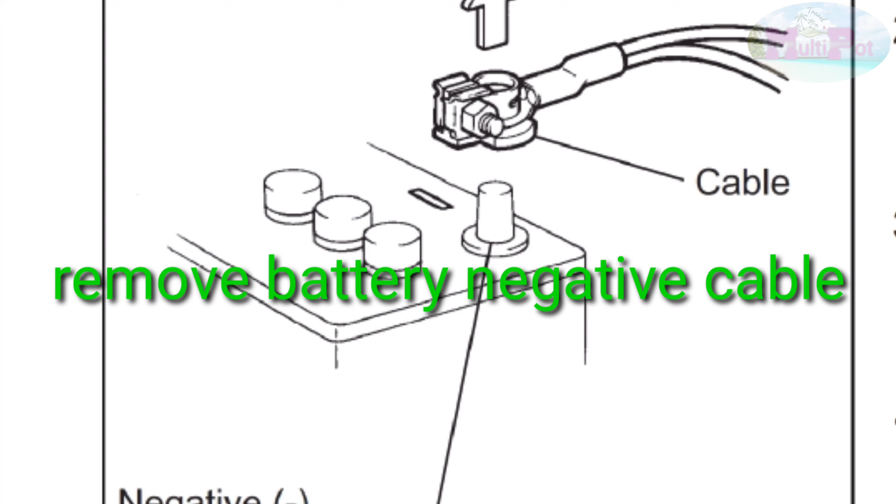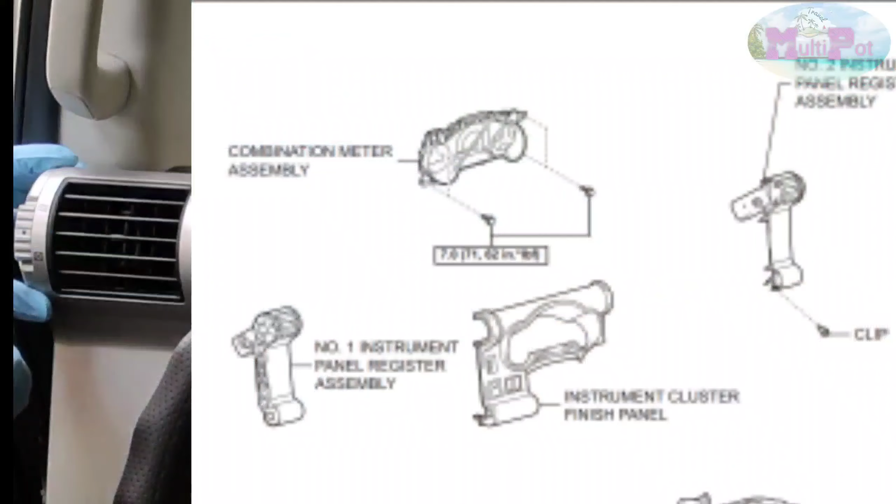Today let's see how we can do the evaporator replacement of FJ Cruiser. It's a 2010 model car. So let's start by removing our dashboard in the beginning. So on the whole, first you need to remove this panel. It's just nut fit and it has 4 clips here and here. Just pull it. All you need to be careful about is just keep the register in the center.

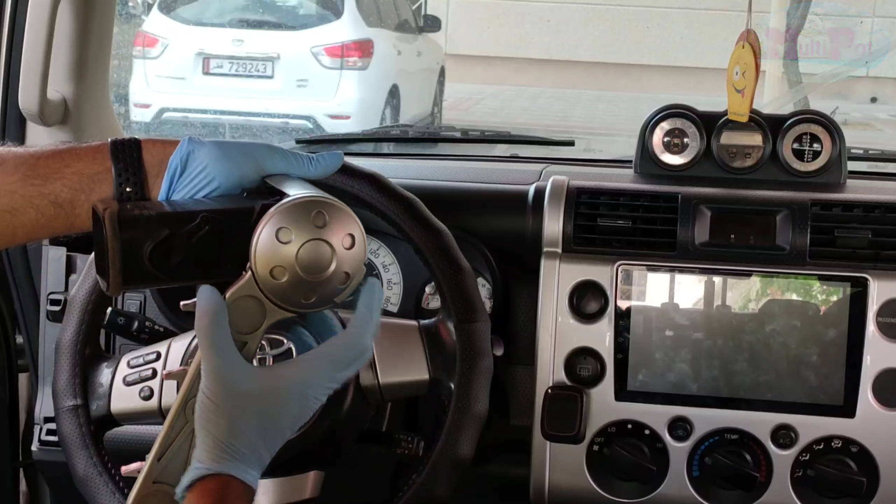Just pull it. When you pull, just try to pull the downside first, and once it starts moving, just pry on the upper side. That's all. You just get it into your hand. See, these are the 4 clips, 1 2 3 4, and all you need to be careful about is this one, just keep it in the center. If it's on one side, see, it may touch there when it's pulled, so mind that.

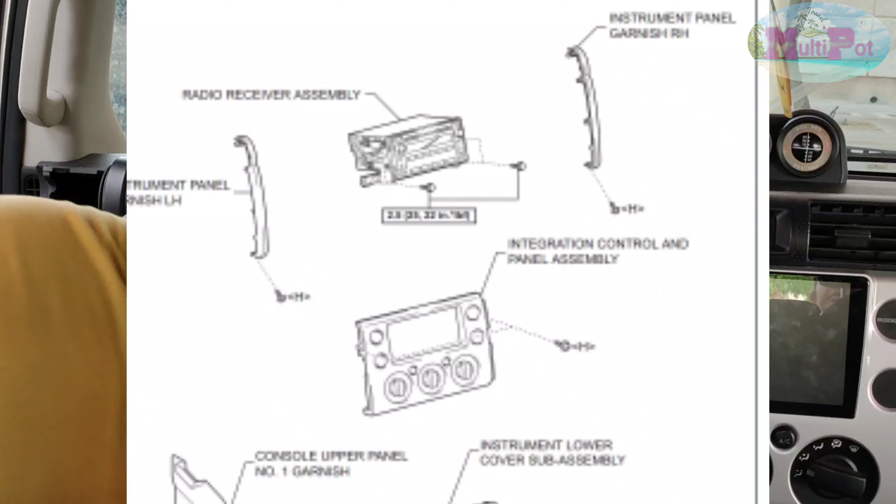That's all. And second, we need to remove this panel. For that panel, all you need is a 10 millimeter bolt down. You need to remove that. No, it's not a 10 millimeter. So on both sides of the panels, these are the trim panels. You find these plus screws. Just remove the screws.

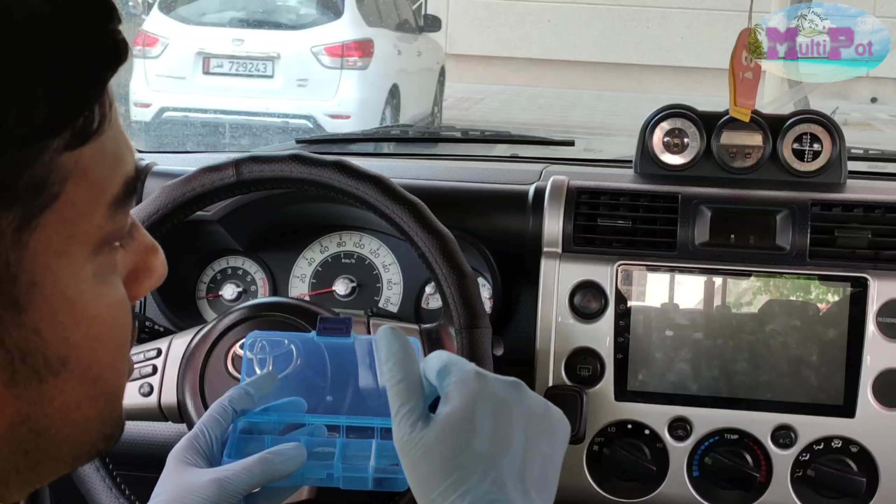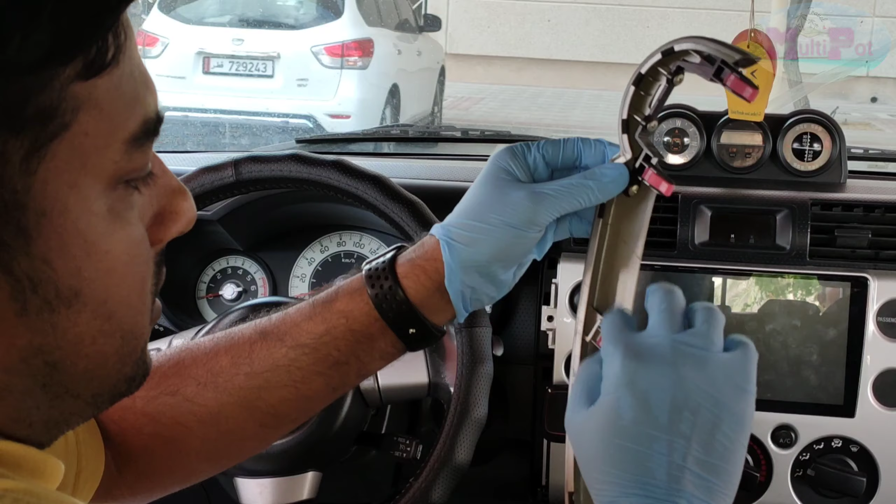And I don't want to miss any of the things, so I just keep the things where I removed them in here. And usually if I could not finish the work in a single day, I write where I removed the screws from and how it was if I find something special, because it's not our daily work, so it's better to have a note on it, so you will not have any difficulty when you are fixing it back. It has 3 pins to remove, and this is fine, it's done.

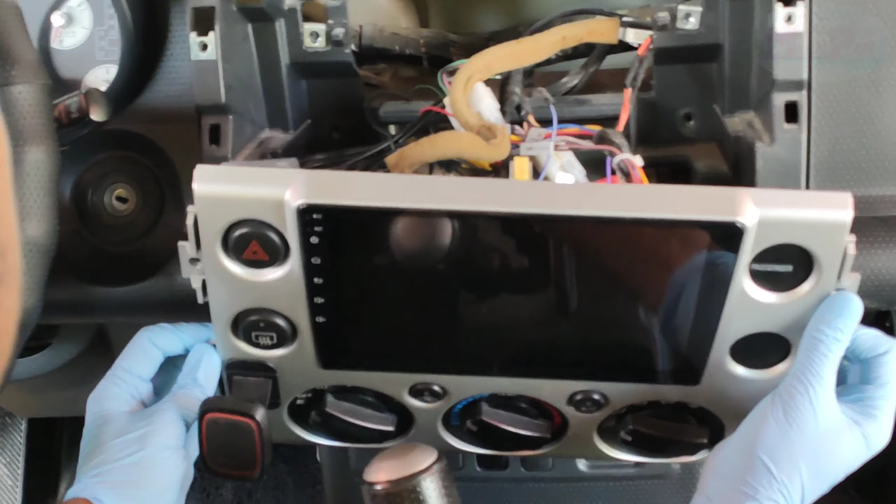2 pieces. Next you may need to remove this panel. It has the connections for the whole unit. Just be careful about it and pull it. Take your time when you are removing all the harnesses, and if you have any plastic tool you can just use it, and you don't need to worry about any harnesses.

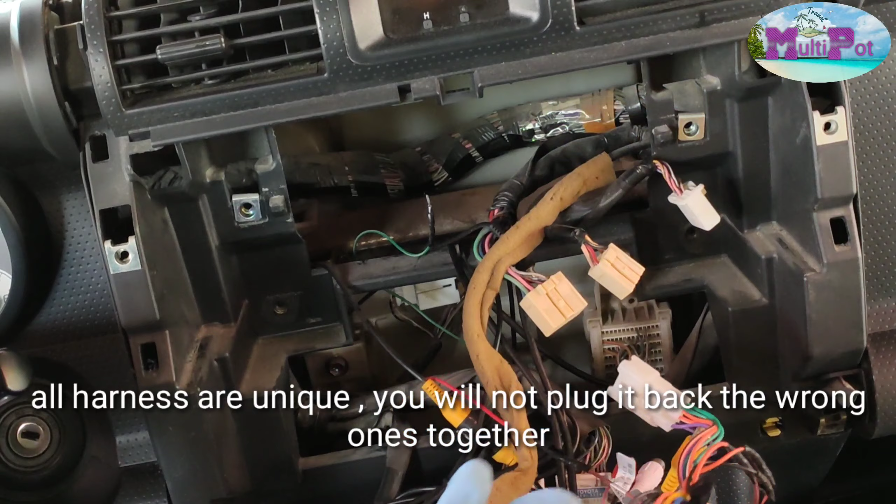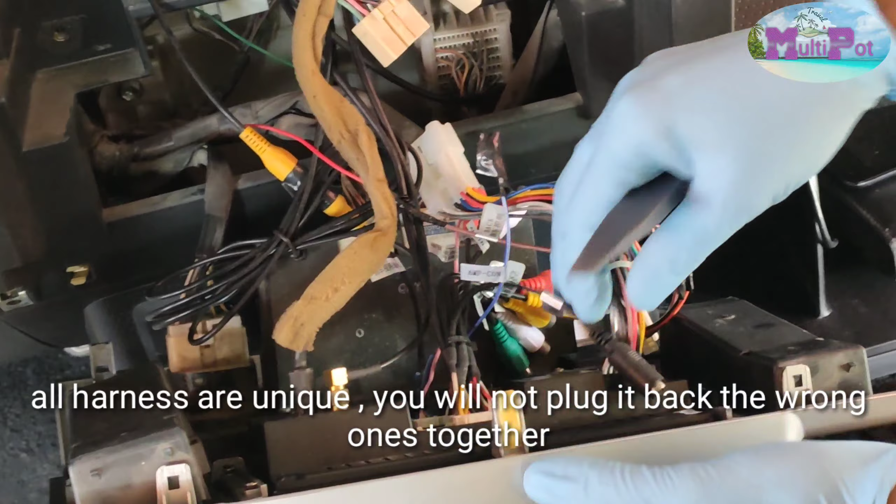You won't mismatch them when you are fixing it back, because all of them are unique, and mine is not a stock system, so there are different connections than a normal stock system in your car. It's a new LED system, and that's all about removing your music system. And just have a look at where you removed the things, and if you take a video when you are removing, it's far better. You will get a better idea, and you can have a reference when you are fixing it back.

You may wonder how I found the evaporator is leaking. In this car there is no way to visibly see it, but I got the smell of the oil which we usually add along with the refrigerant. The gas doesn't have any smell, but the refrigerant oil has a smell. So I felt the smell when I turned on the AC.

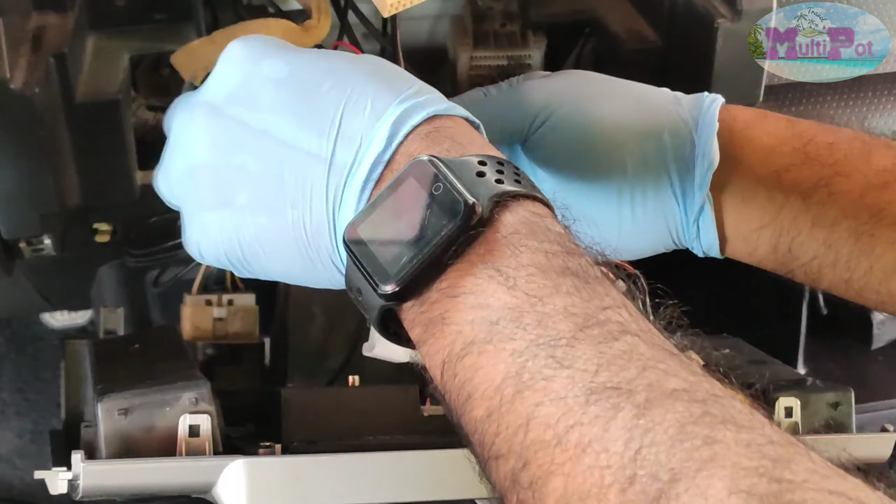Usually in the beginning we get the smell, so I thought to remove that. Usually the smell comes when the evaporator is leaking. If I keep running with the same evaporator, eventually it will lose all the oil and end up ruining my compressor as well, so I don't want to do that.

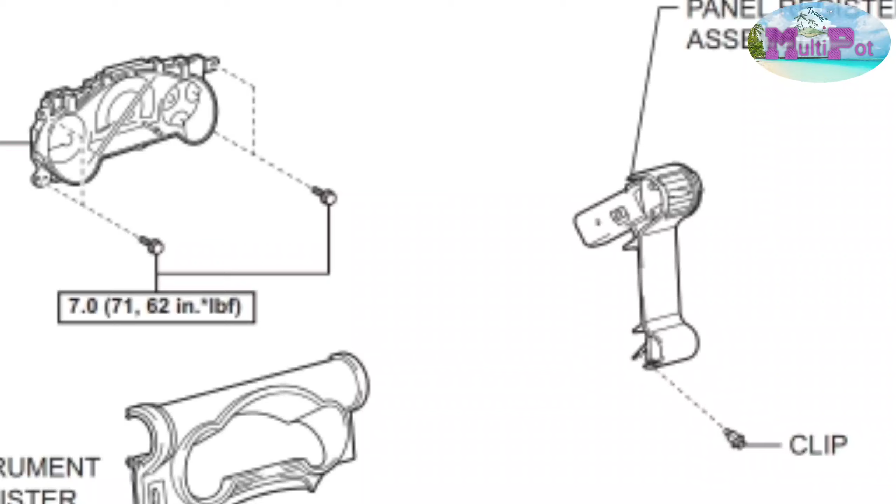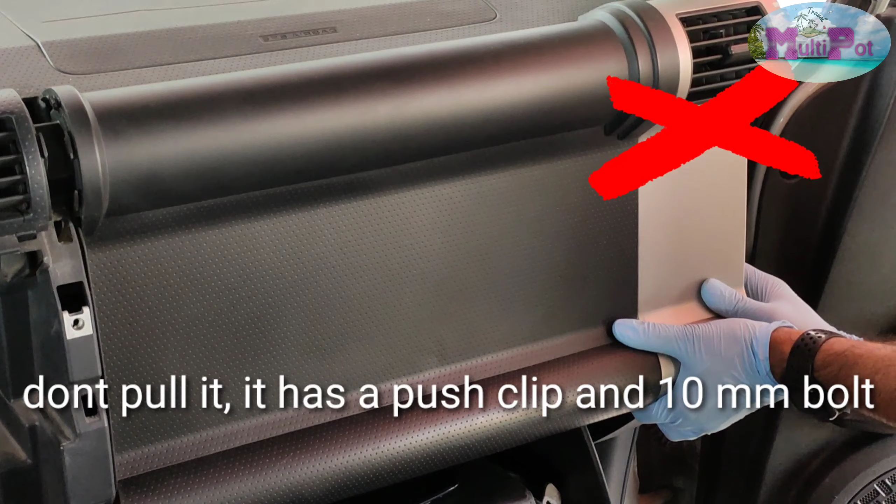When you come to remove the panel assembly on the right hand side, it's a bit different than the one on the left. It has a pin on the downside, and it has a horizontal 10 millimeter bolt which is inside, so don't attempt to pull it. I tried to pull it, but I have the procedure chart with me, so I had a look at that and I came to know that. See, here are the pictures for that. Just have a look at this.

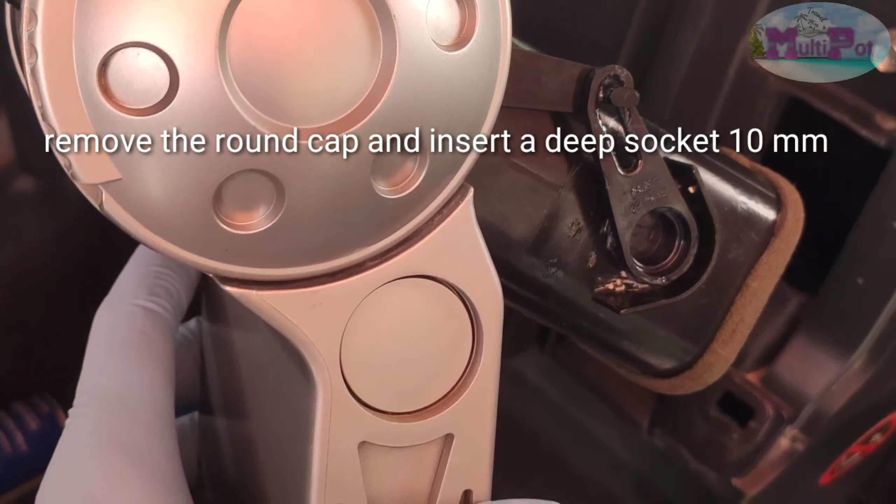You see the round part at the bottom, you just pry it with any pointed thing or your plastic tool. You will find a 10 millimeter bolt inside. Just remove that and pull it like you did on the left hand side. That's all. To access the lower pin, you need to remove the glove box and the panel just behind it. The glove box you can just push on both sides and remove it, and for the panel there is a screw. You just need to remove that and pull it down. That's all.

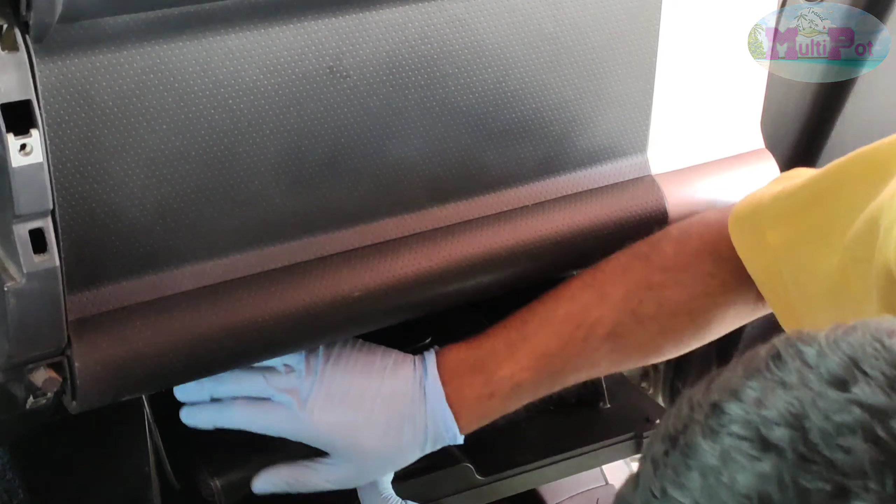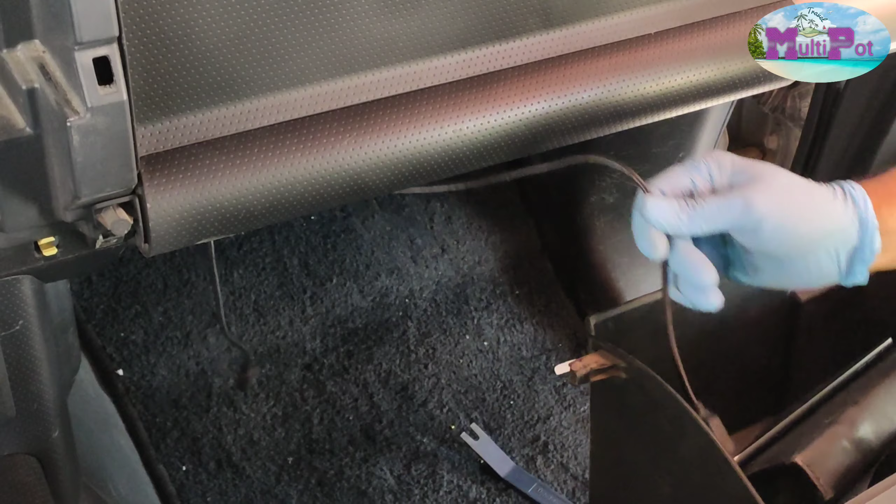Remove it from here. Remove the glove box. On the right hand side of the glove box you will find a movement control. I don't know what the name of the part is exactly. It just controls the movement in a slow paced way. Just remove it. It's just a hooked up thing, the one with the yellow end. Just push it out, then take the glove box out.

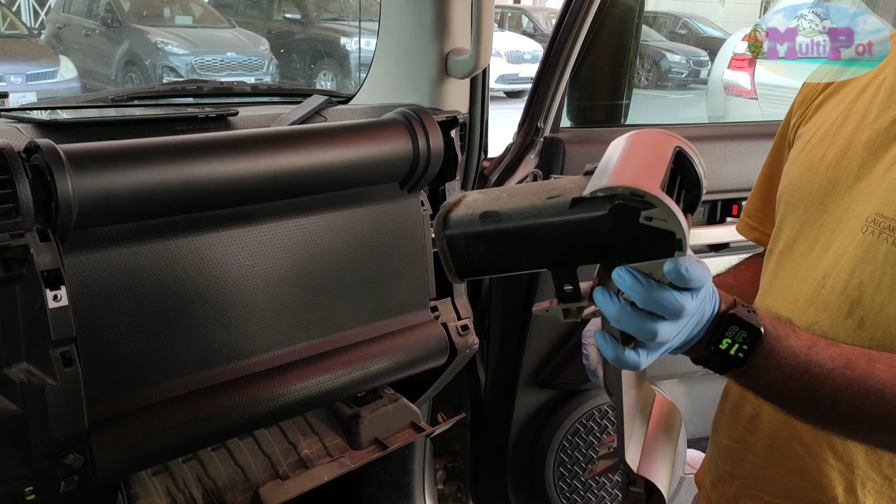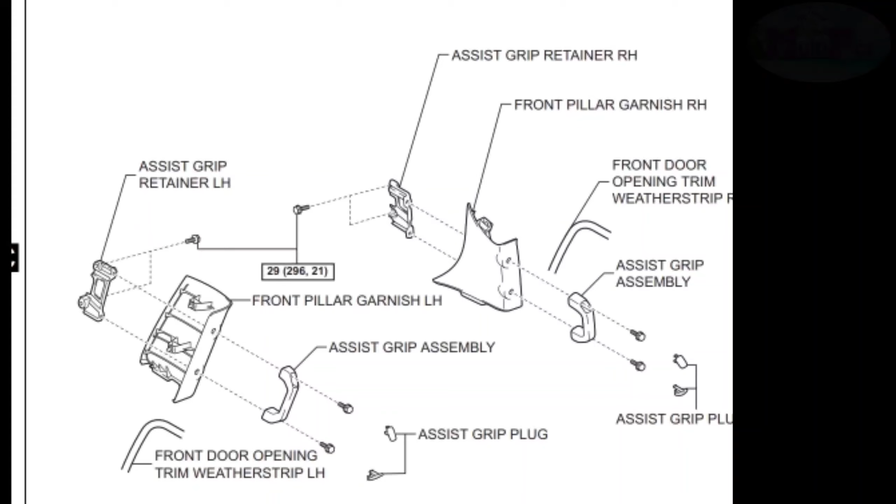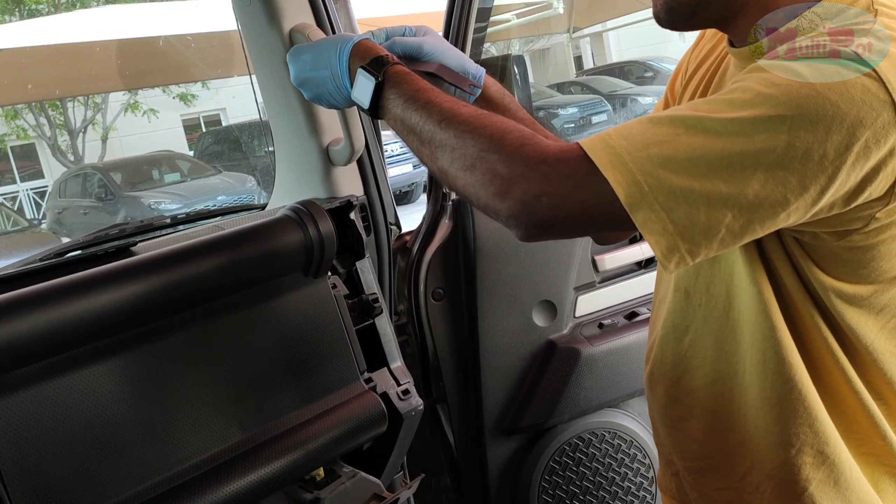Once you remove this panel, you will be able to pick the screw for this. So remove this part as well. So once you're done, next is the A pillar cover. The cover you need to remove, and I just keep it in this. If not, I may miss it.

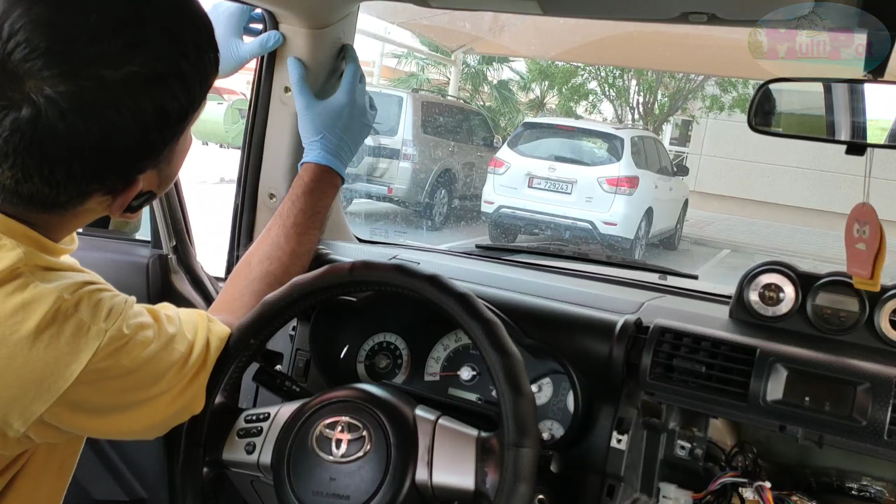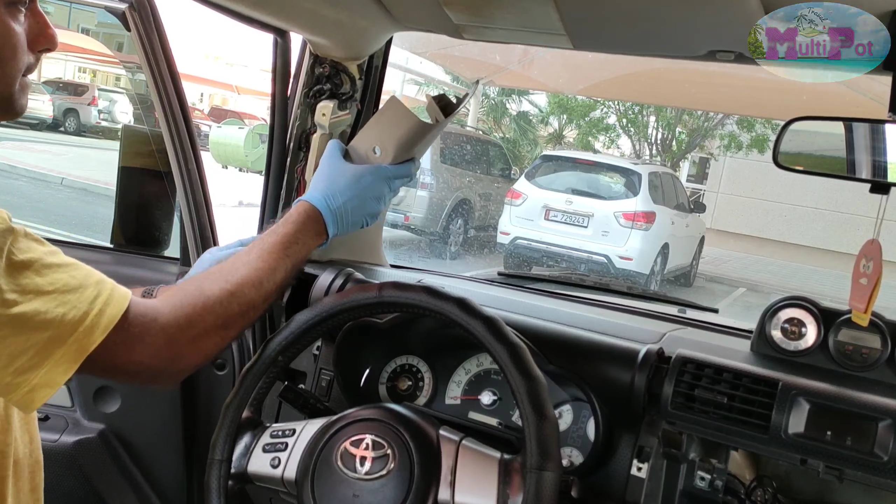This A pillar and its cover, I just kept it there, and just remove the weather stripping. The stripping, you need to be a little careful. It's even the same thing with the weather strip, you need to pull out. And there is a 10 millimeter you need to remove.

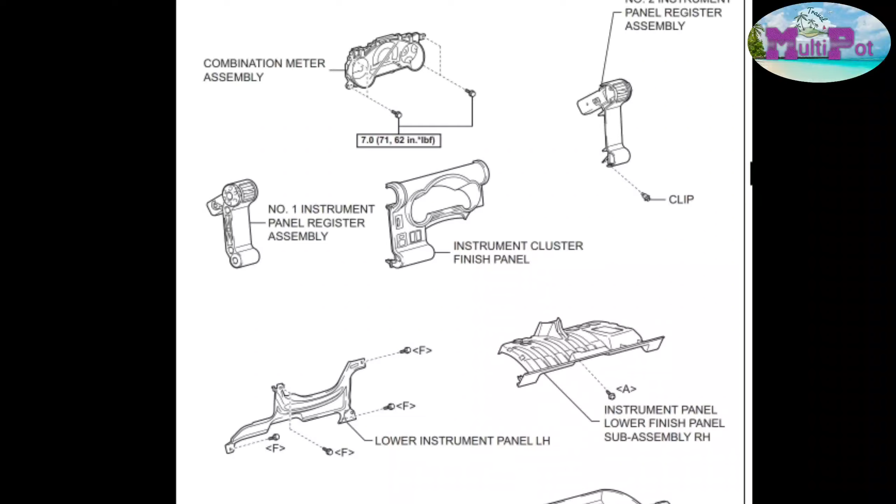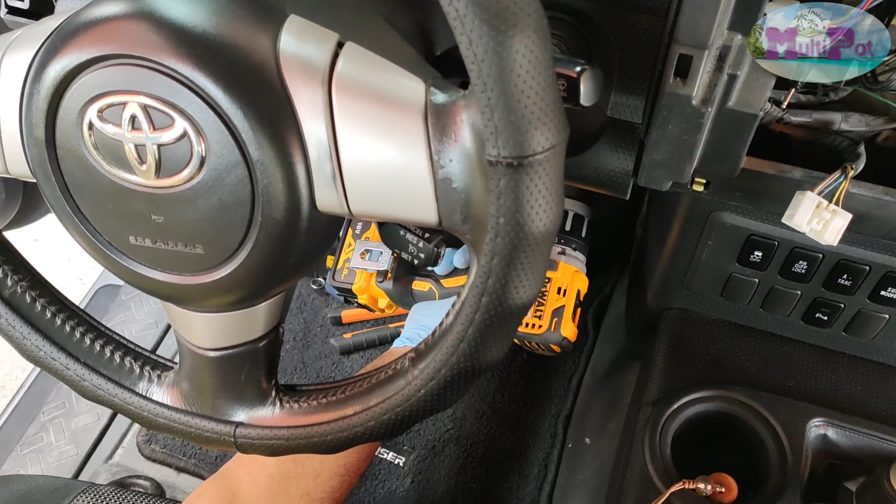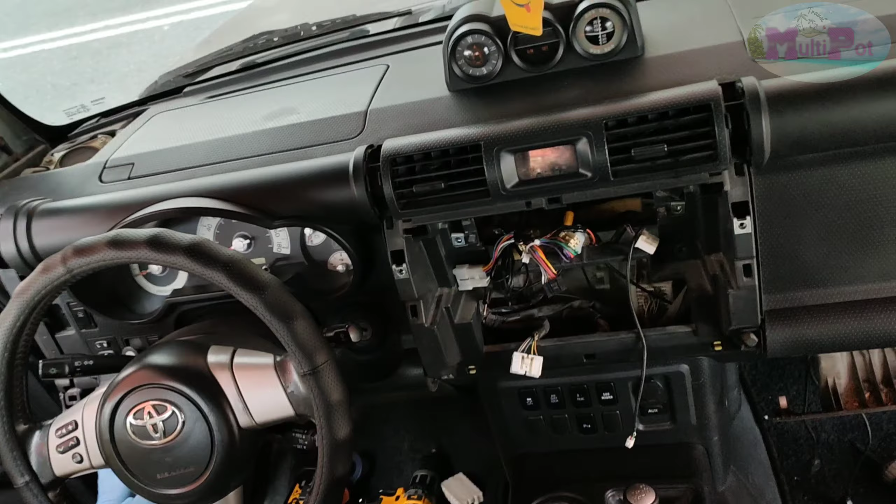Now you need to remove the panel just above the steering and around the cluster. Let's remove that. For that it has two 10 millimeter bolts on both ends. Just remove that and you can just pull it easily. And there is a panel as well for this. Here there is a 10 millimeter.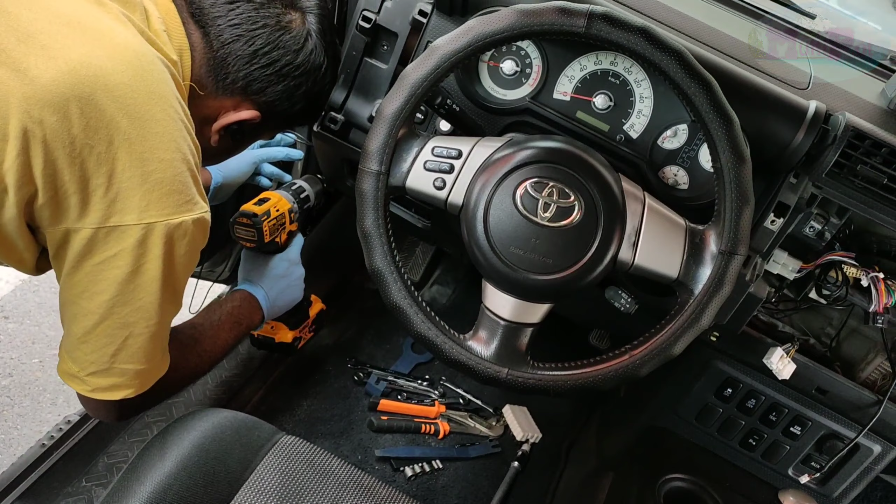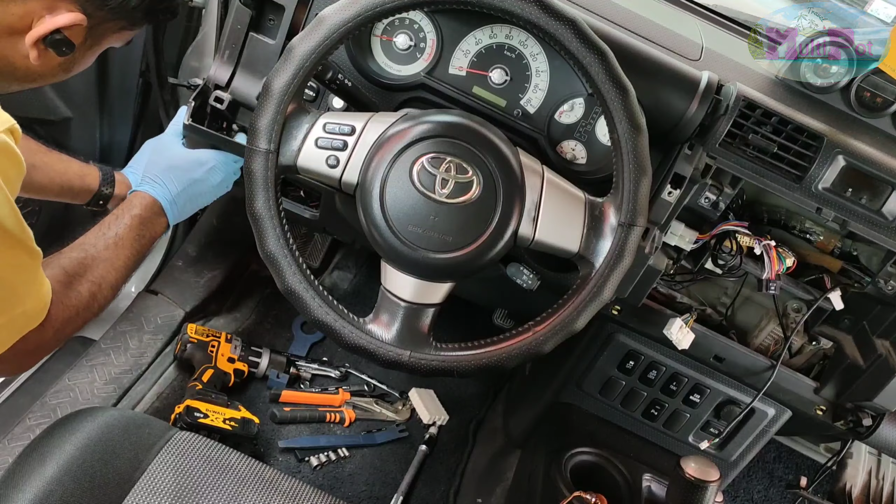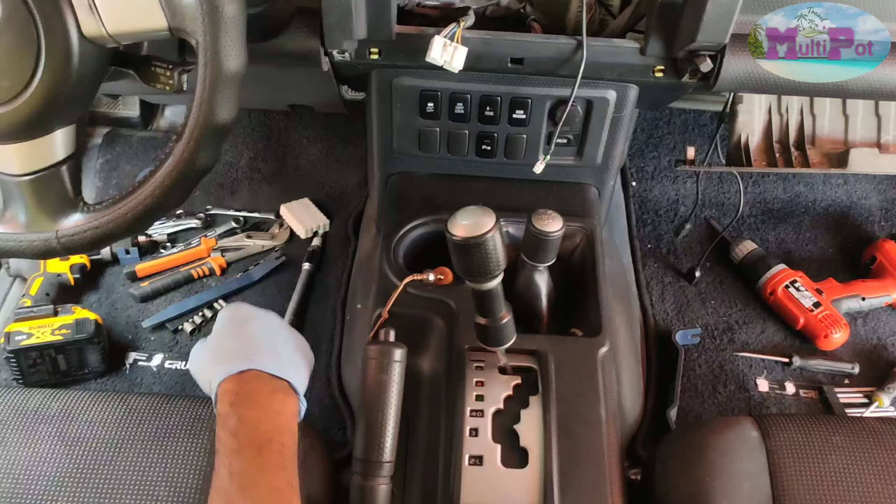Once these two bolts are done, you can just pull this off. But before that, just remove the ring around the key where you insert. Just remove this one, or else it may just break off. It's just a snug fitting thing. Just remove that. And now we can just pull this off.

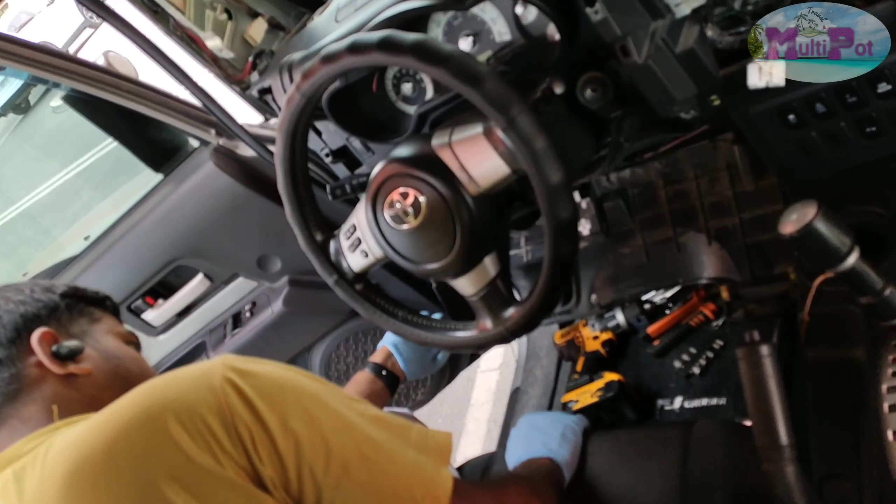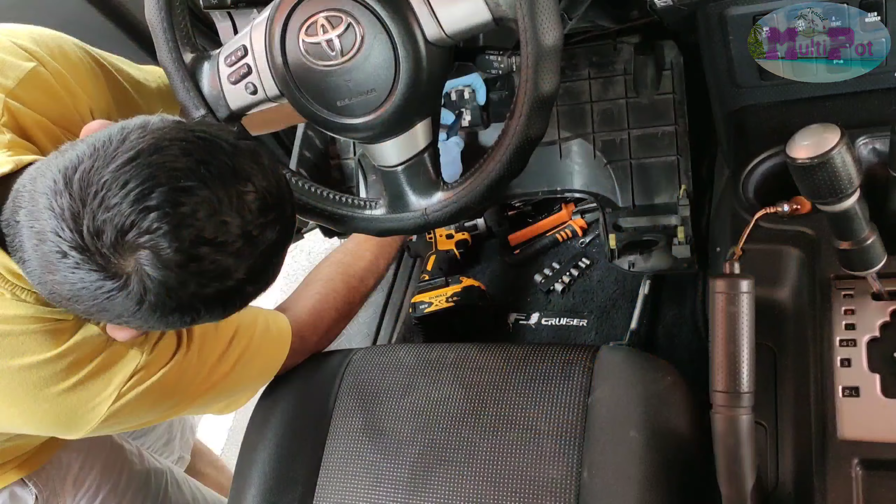It is just connected with the hood opener latch, and if you just remove the plug for the hood opener, you'll be able to remove the panel and keep it away. Just use your plastic tool, just depress one end and push it out. You'll understand that once you see that.

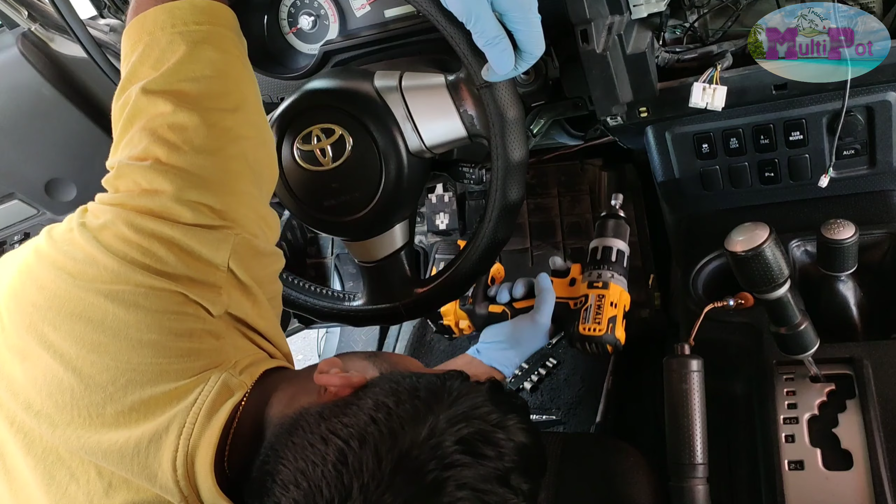Below that panel you will see a metal frame which has 4 bolts. You need to remove that as well. Now you can just see 2 bolts up and 2 on the lower side. You can just remove that as well, and easily you can just pull it out. Here one more. Okay. Once that's done, just pull this out.

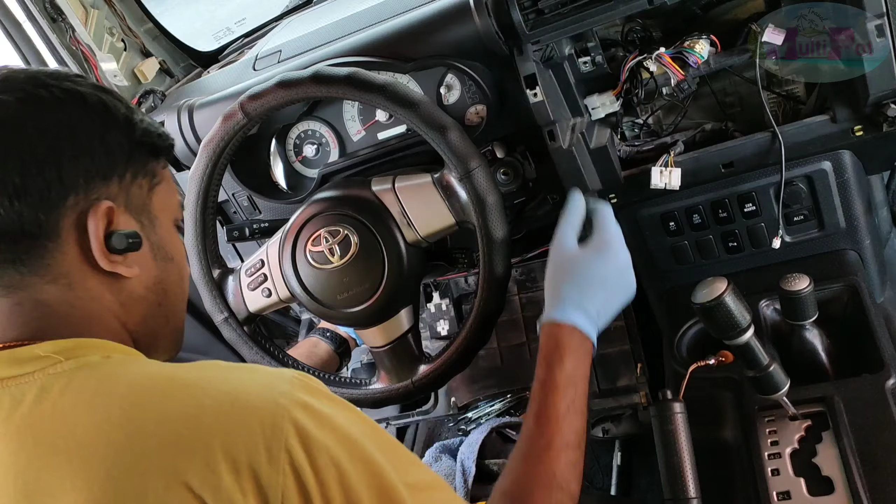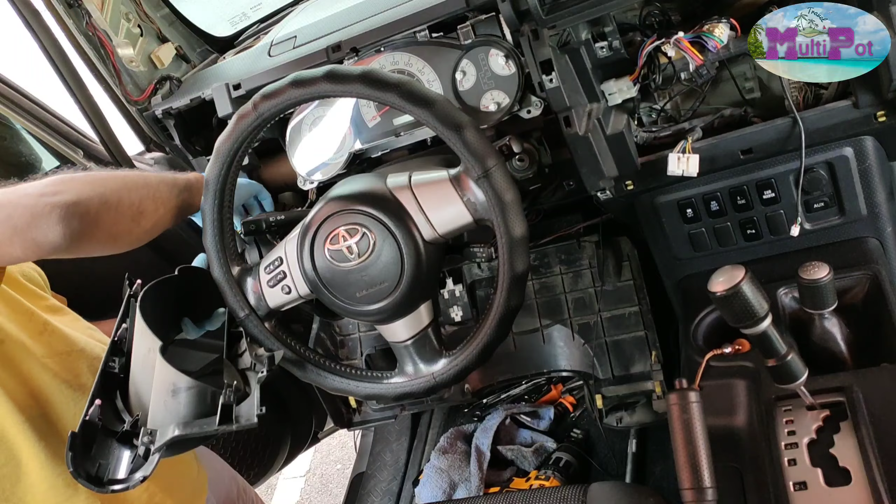When you remove this panel, just try to pull the things on the right hand side and turn the panel on the left, because on the left hand side there are some harnesses which are connected for the switch and mirrors. So just care about that, just turn it that way, and once it's done, just remove the connections from that side. And remove the connections which are connected over there.

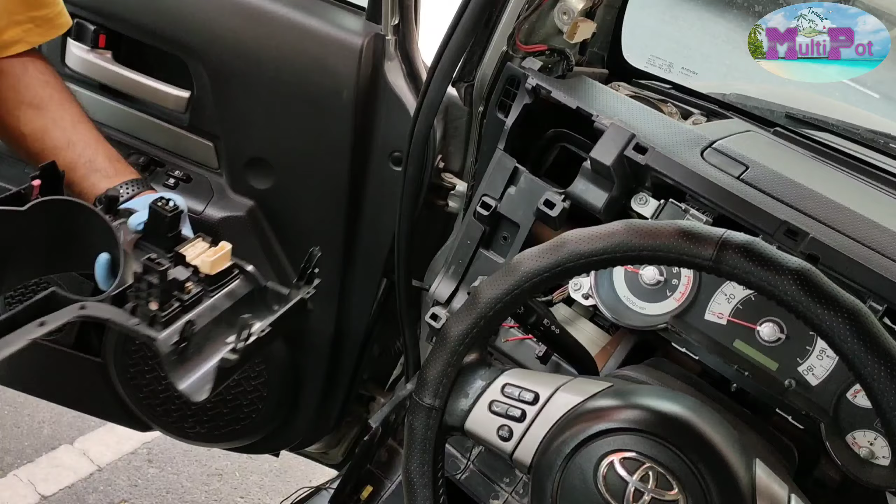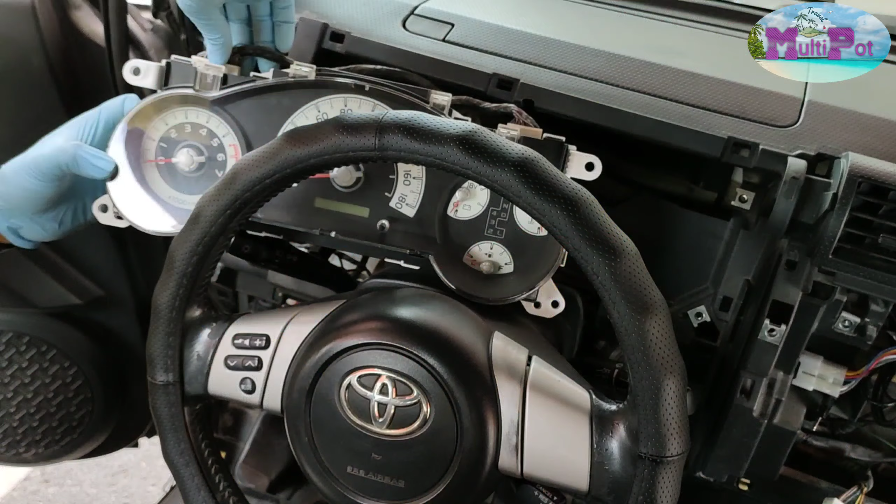Now the instrument cluster, it has 4 10mm bolts. Just remove that, or you can use a Phillips screwdriver to remove that. Remove it manually. And remove the connections of your instrument cluster. It has 1, 2. And remove the plug which stabilizes the wires, and once you remove that, you'll be able to take the instrument cluster out of the place.

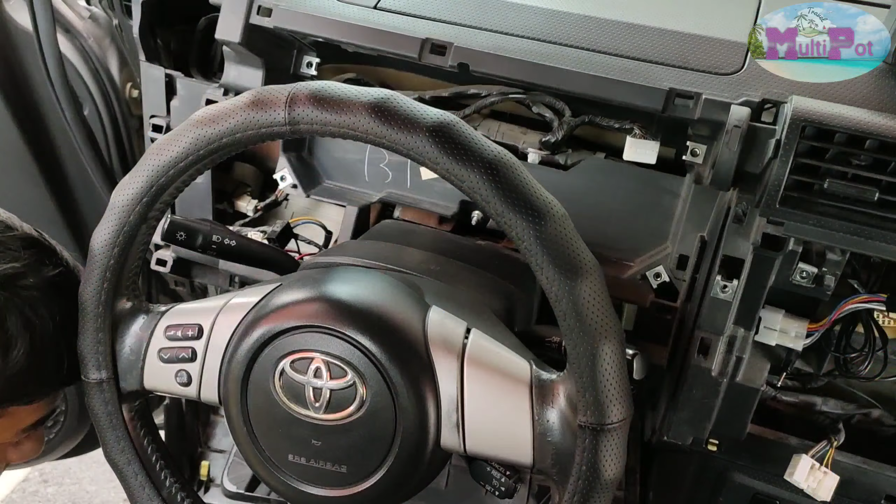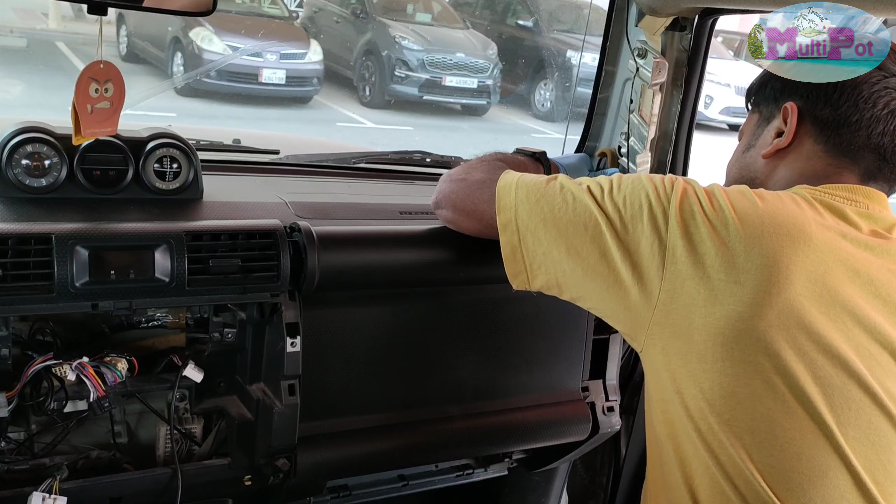There is a 10mm nut which is just behind the steering or the instrument cluster. You need to remove that. You may need to remove the cover of your speaker. There are 4 clips on the 4 corners of that cap. Just insert your plastic tool in it and just pry it out. It will be easy to remove that. And once you remove the cover of the speaker, you'll find a 10mm bolt. Just remove that.

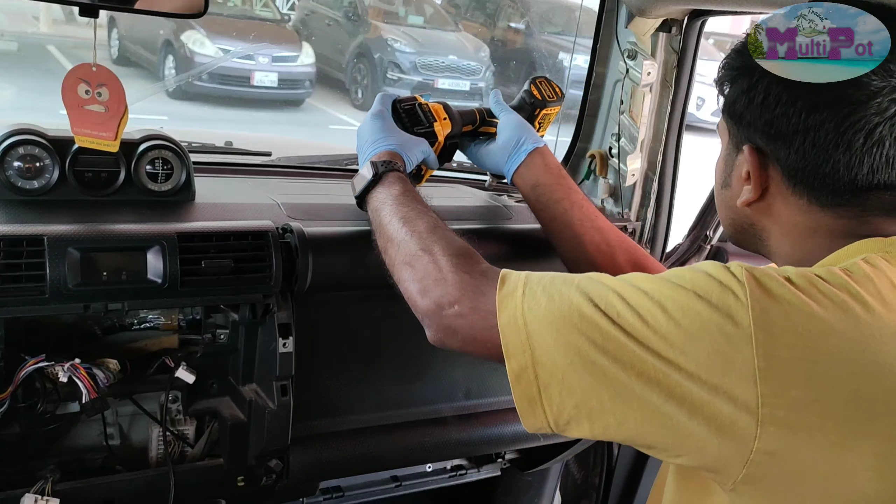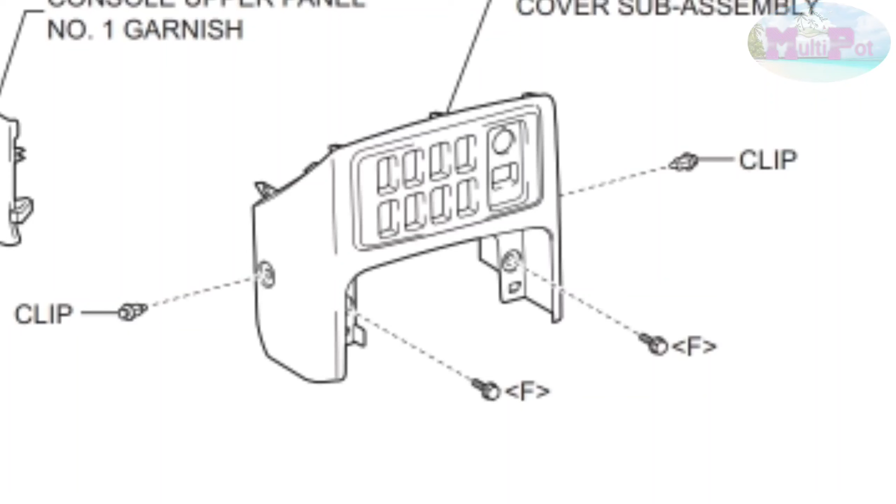Now let's come to the center console. This part we need to remove. Before that, we need to go for the center console, which includes the gear levers and the handbrake lever. But before that, let's remove the 2 plugs, which are push-in type plugs. Just remove that from here. Remove this one. There's a pin. You need to remove this pin.

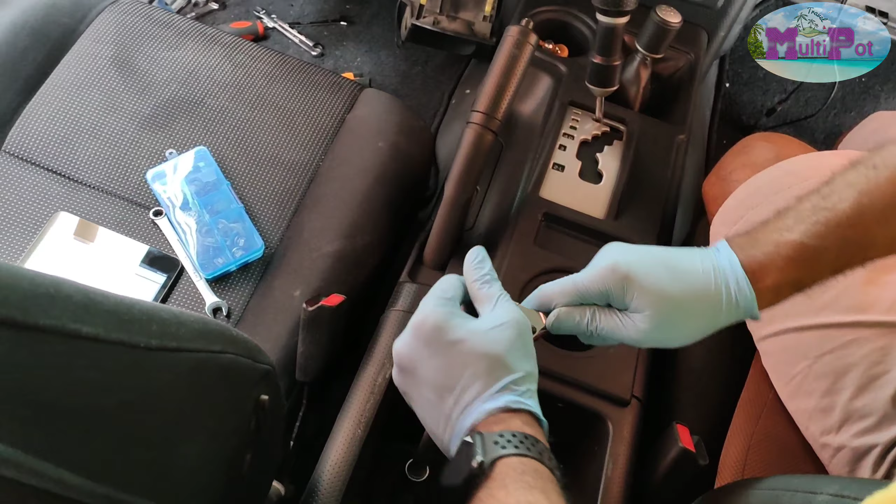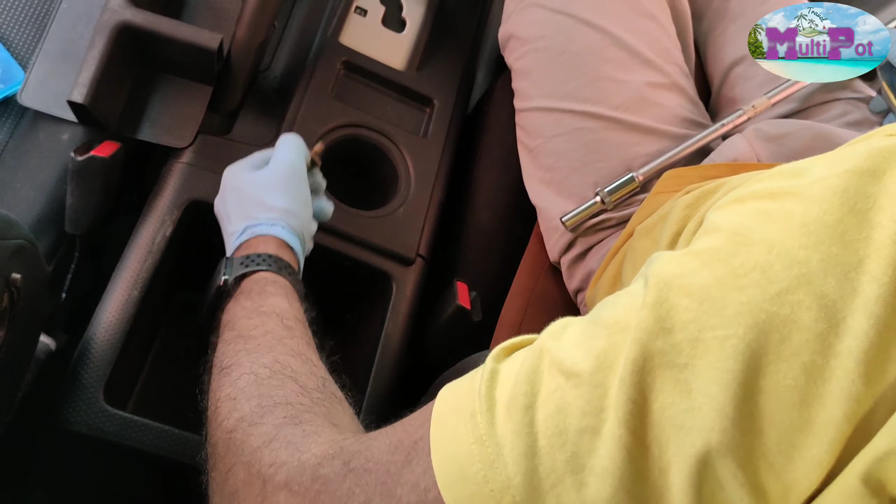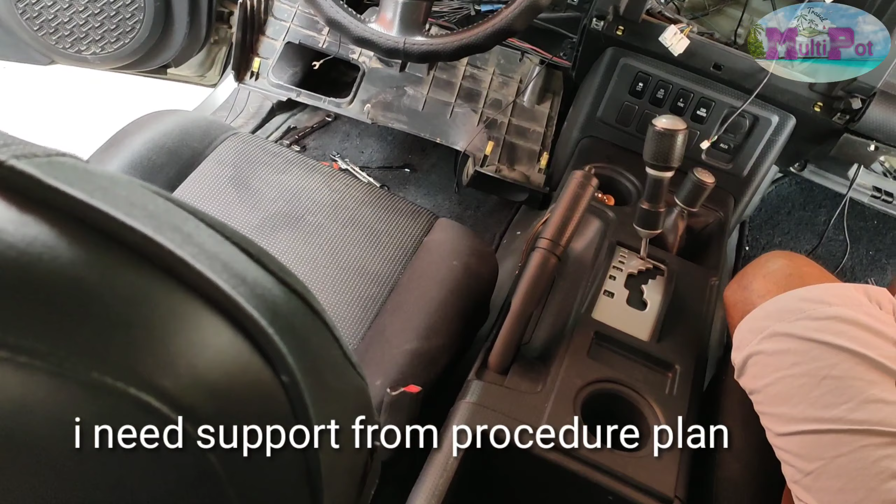Now we need to remove the center console. For the center console, we need to remove the 2 10mm here on this storage space. Remove the 2 gear knobs. Just turn them anti-clockwise. Then pull the panel up, and it will be easy to remove the panel. Then you can just pull back the entire center console panel. Now we need to remove this panel up.

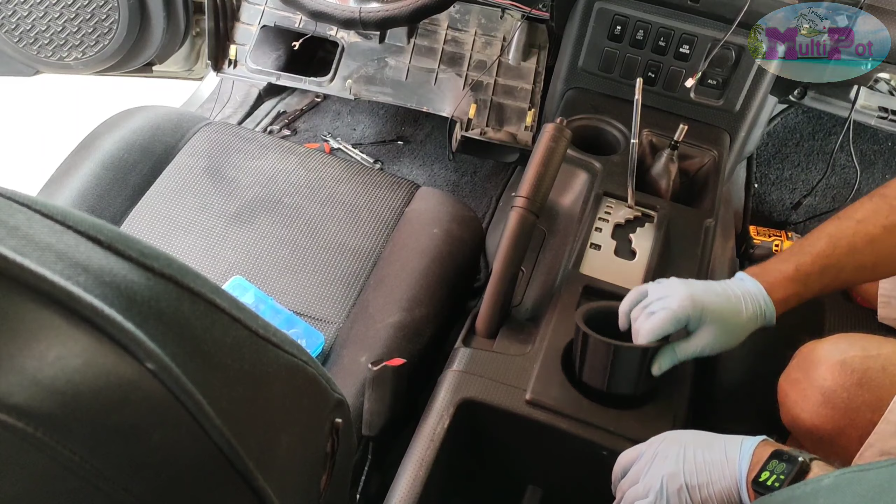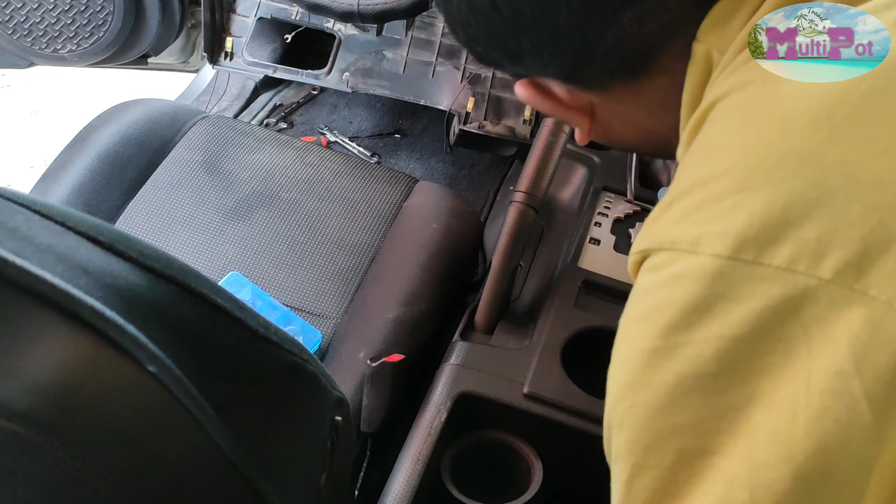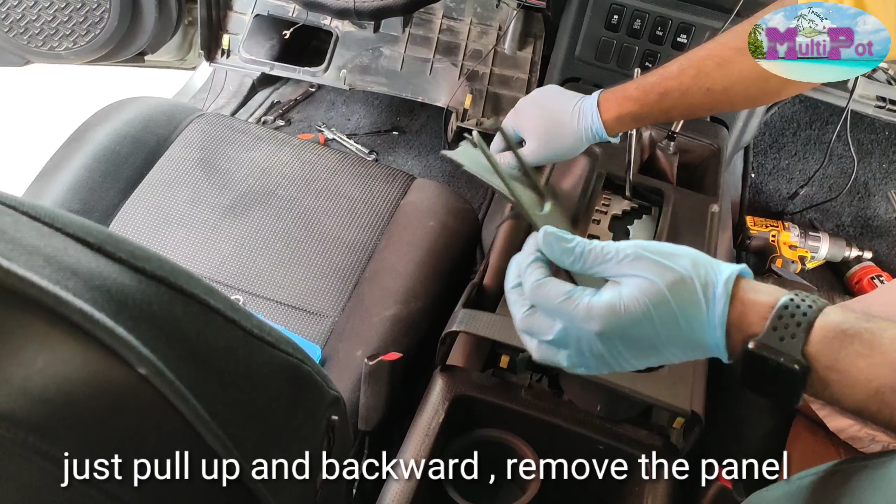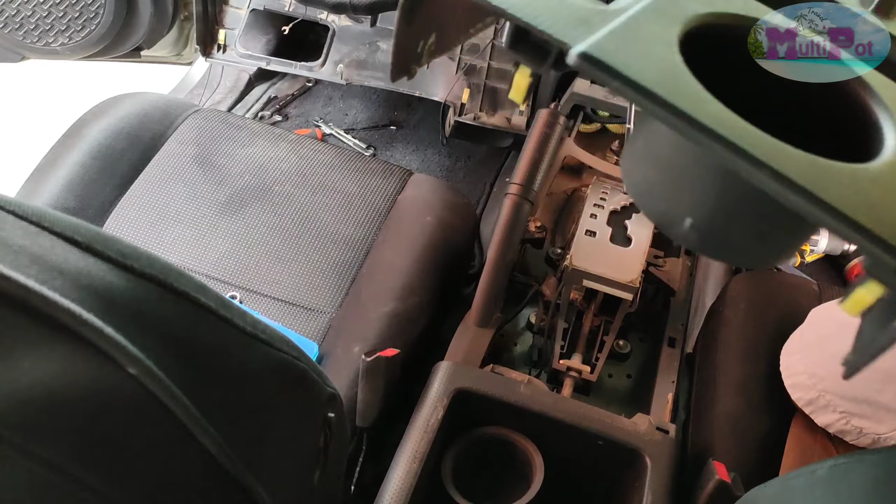Just remove the one for the handbrake. Keep this here. And remove that panel. It's easy to remove that. Once you've done that, there are 2 10mm here. You need to remove that as well.

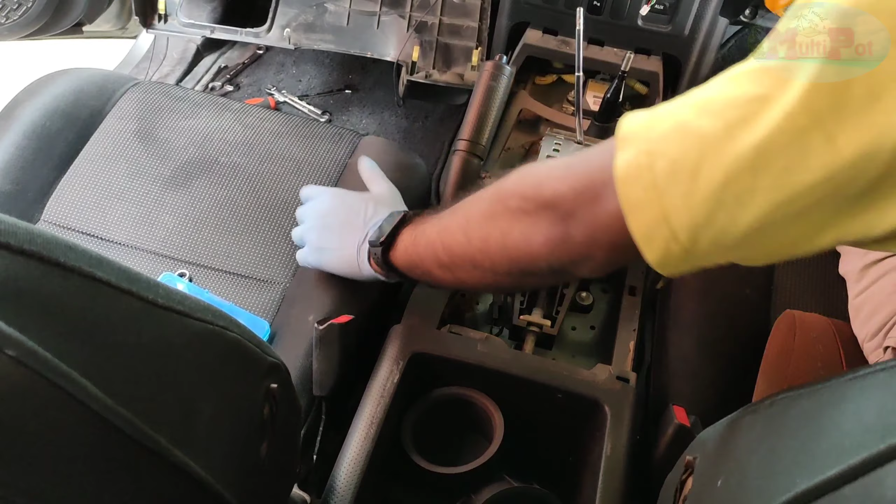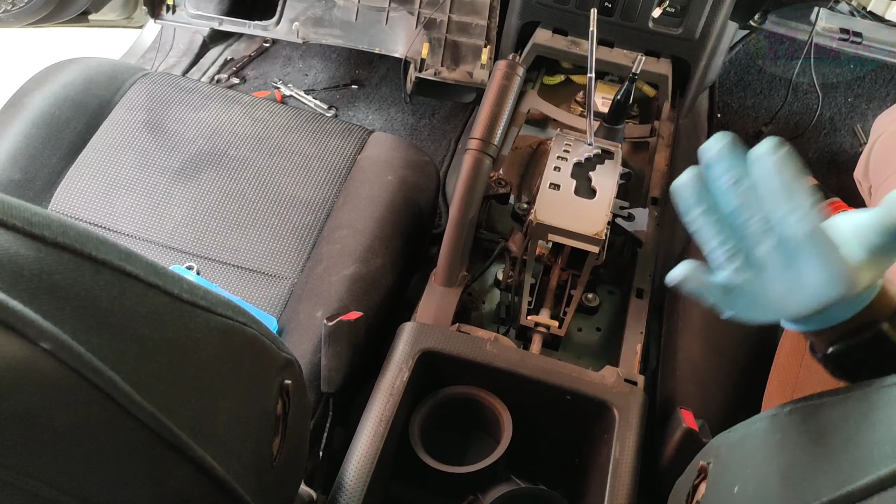It has 4, and I just keep the 4 in this. Just pull this out.